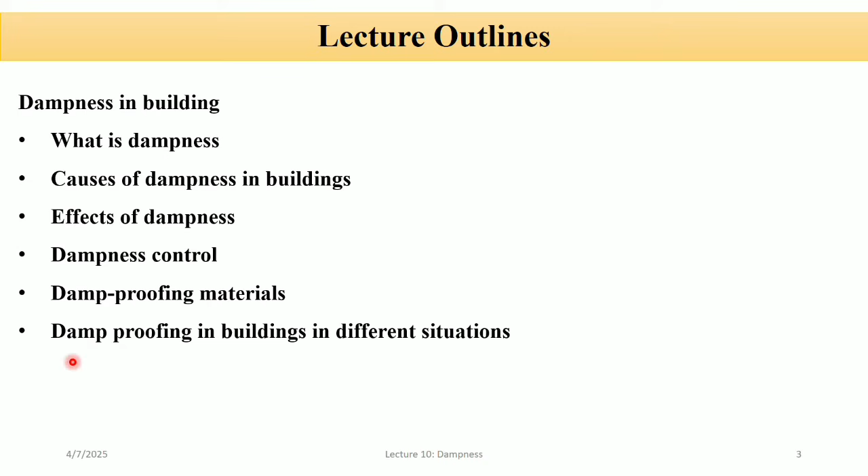Let's start lecture number 10. So the lecture outline is dampness in buildings. In this we will define dampness. After that we will discuss causes of dampness in buildings, then effects of dampness, how to control dampness, and damp proofing materials. And last, we will discuss damp proofing in buildings in different situations.

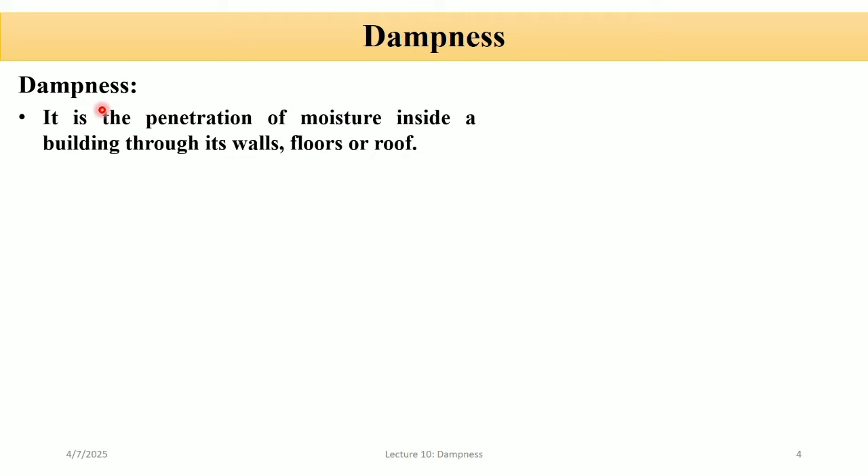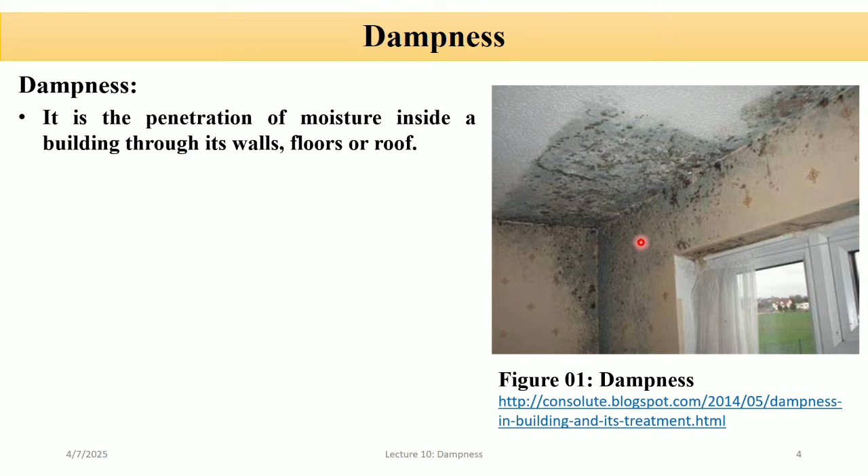Dampness. So it is the penetration of moisture inside a building through its walls, floors, or roof. Or we can say that dampness in a building refers to the presence of unwanted moisture or water within the structure, such as in walls, floors, and ceilings. So it can result from several sources like rainwater penetration, rising damp from ground, leaking pipes, or condensation.

So it can lead to serious problems like damage to structural material, growth of molds, poor indoor air quality, reduced insulation effectiveness, and unhealthy living conditions. We will study the causes and effects of dampness later.

So, dampness has been a persistent issue in buildings since ancient times, primarily due to water infiltration from rain, groundwater, or plumbing leaks. As construction techniques evolved, the need for proper moisture control became more evident to protect building material and ensure occupants' health. So, modern building codes now emphasize damp proofing and waterproofing methods to prevent structural damage and indoor environmental problems.

So, the moisture present in air, in ground soils, or rainwater may penetrate into the building, which may cause damage to various components. And dampness is not only dangerous for the building, but it adversely affects the health of its inhabitants as well.

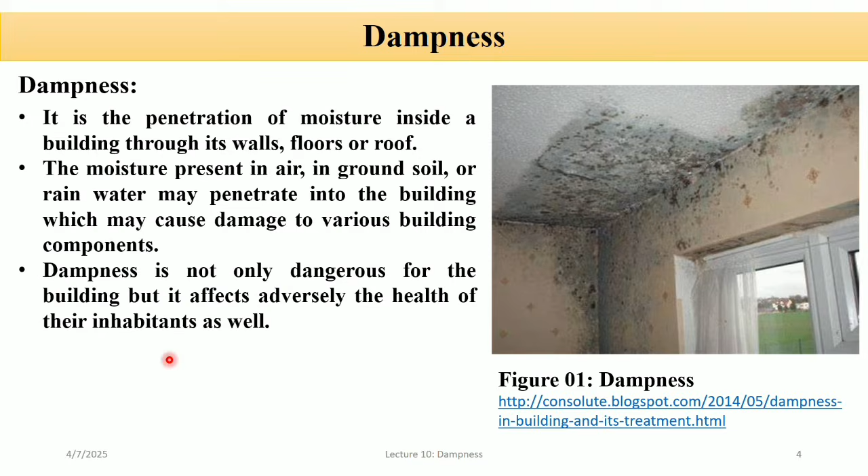General causes of dampness. So moisture can penetrate inside a building through walls. Rainwater can seep through cracks, porous material, or poorly sealed joints in external walls, especially if there is no proper damp proofing course or waterproofing layer. Second one is the floor and foundation. In floors, groundwater can rise by capillary action if there is no damp-proof membrane, particularly in basements or ground-level rooms.

The third one is roof. So, a damaged roof allows rainwater to penetrate inside, especially around joints, tiles, or flashing where water can easily collect and seep. Air. So moisture-laden air or humidity can enter through gaps around windows, doors, or ventilation systems, leading to condensation on cooler surfaces inside the building.

And last one is leakage in water supply and sanitation systems. So leaking or broken water pipes within walls, floors, or ceilings can introduce significant moisture, causing damp patches, mold, and even structural weakening over time.

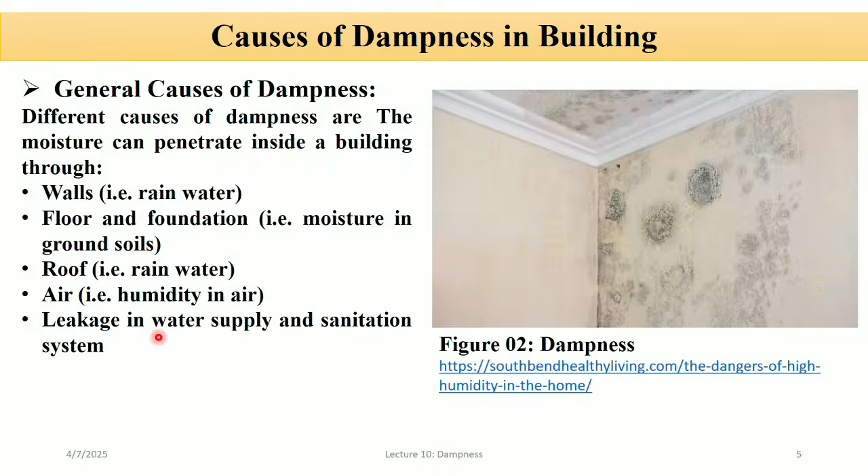Rainwater penetration. Rainwater penetration is one of the most common and significant causes of dampness in buildings. You can see in the figure. It occurs when rainwater enters the structure through various vulnerable points, especially if proper protective measures are not in place. So rainwater can penetrate into the building through its roof, if it is made of porous concrete, has cracks, or suffers from faulty roof treatment. This leads to water entering directly into the building's upper structures.

The second one is walls. So if the walls are made of porous material, such as certain types of bricks or poorly compacted concrete, rain can be absorbed and transmitted inwards. Additionally, mortar joints that are weak or deteriorated can allow water to pass through.

Openings. So openings are doors, windows, and ventilators. Gaps or poor sealing around doors, windows, or ventilators can let rainwater in, especially during wind-driven rain. These areas are often weak points if not properly sealed or maintained.

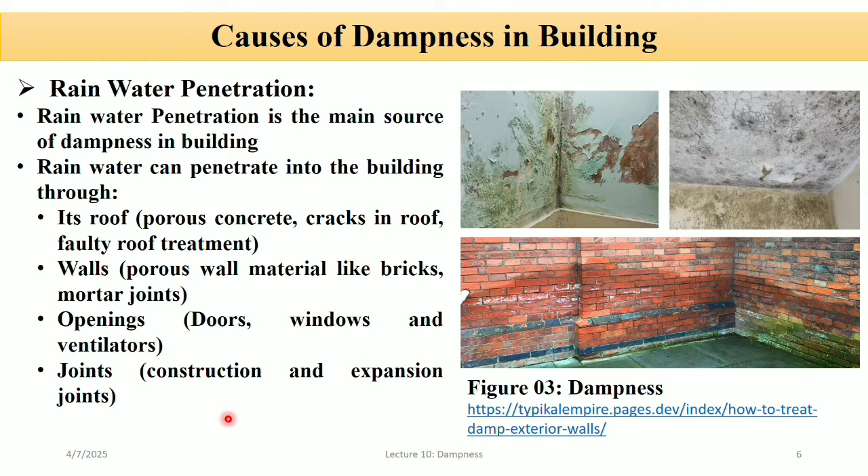Level of sites and drainage of soil. So it is an important factor that can cause dampness in buildings. If a building is constructed on low ground, rainwater or surface water can collect around it. This water may then seep into the building through its walls, foundation, and floors, especially if drainage is poor.

But if the building is constructed on higher elevation, it can be protected from dampness because the water can drain away. Also, the type of soil affects how water behaves. Gravelly or sandy soils allow water to drain quickly, but it can still let water reach the foundation.

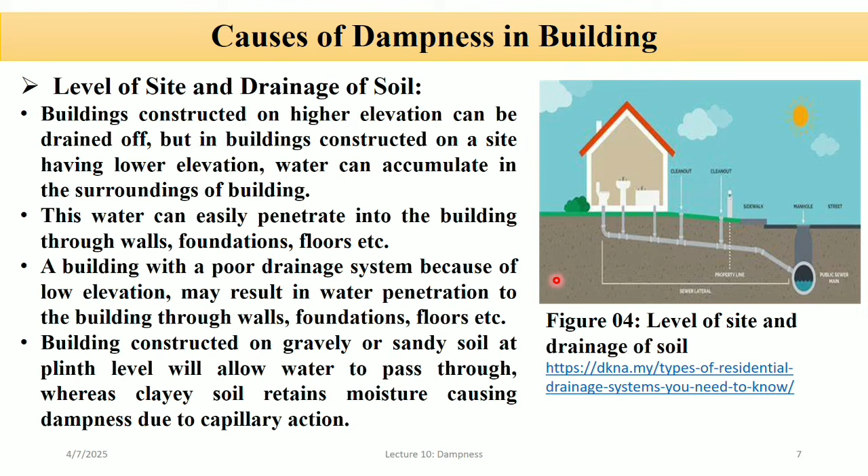Clay soil, on the other hand, holds water for a long time. This water can rise slowly through walls and floors by capillary action, leading to dampness. So we can say in short that low sites and poor drainage combined with water-retaining soil increase the risk of moisture entering a building.

Water supply and sanitation system. It can be a major cause of dampness in our building if not properly maintained. When a water or sanitation pipe leaks, the water slowly seeps into nearby walls, floors, or ceiling. This leakage often happens due to defective pipes, loose or faulty pipe joints, or broken taps, toilets, or basins.

As a result, the wall behind a bathroom or kitchen gets damp, showing signs like peeling paint, stains, or mold growth. If not fixed in time, this can damage the structure and create an unhealthy indoor environment.

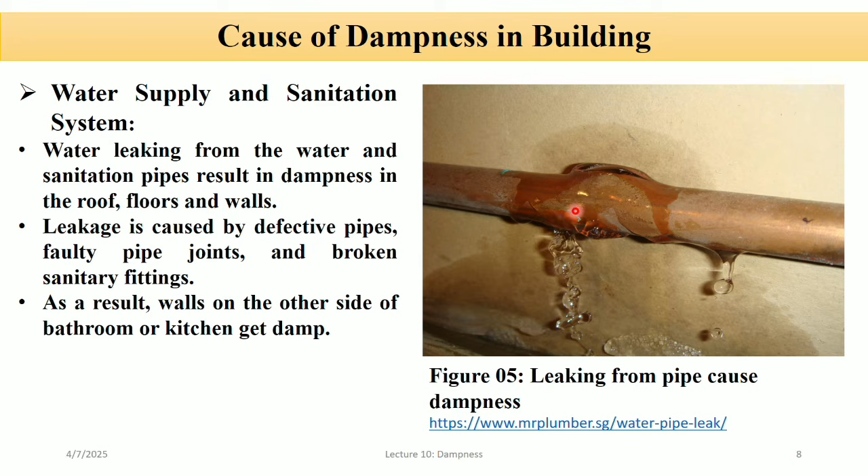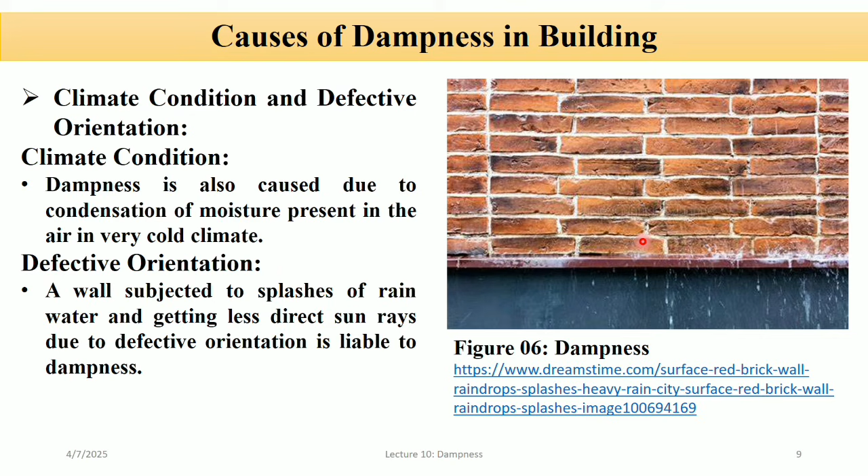Defective orientation. If a building or a wall is not placed in the right direction, it may be more exposed to rainwater splashes and less sunlight. For example, a wall facing the wind and rain may get soaked more often, and if it does not receive enough sunlight to dry, it stays wet longer. This poor placement or defective orientation can make that part of the building more prone to dampness.

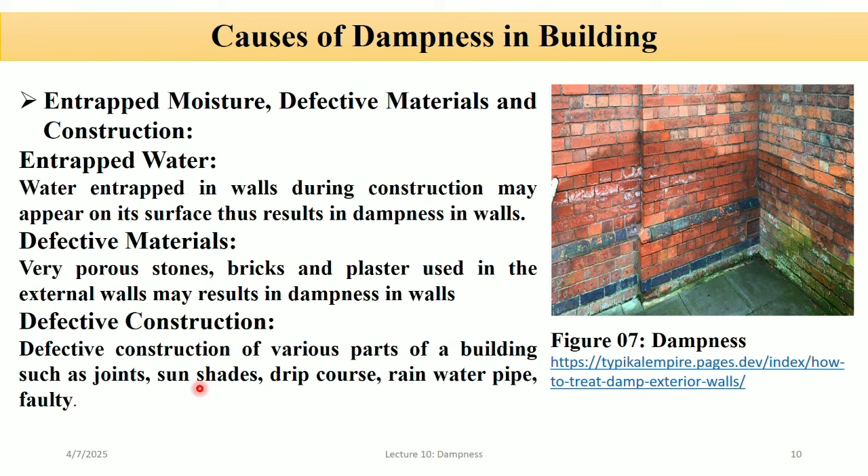Poor workmanship or missing important features in the building can lead to dampness. For example, improperly sealed joints let water pass through, faulty sunshades or drip courses fail to direct rainwater away from walls, and leaky rainwater pipes or poorly installed plumbing can let water enter the structure. So all these construction faults create weak points where water can enter and cause dampness.